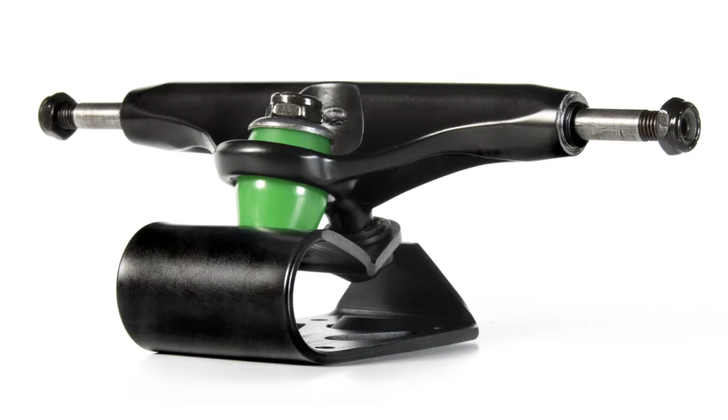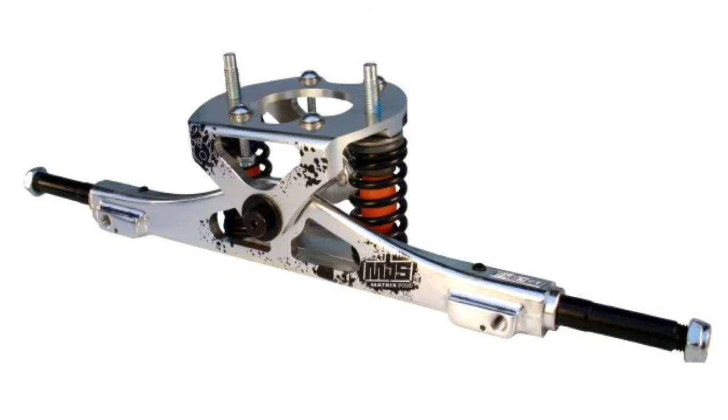So the suspension first. Looking online, you can see this example called an Avenue truck, which is basically just a piece of metal that bends and has some flex to it. There's this other truck that has springs in it.

I didn't really like either of these because I found that they were both a little complicated, and this one tends to create speed wobbles, which impact your ability to ride at high speeds. This one just seems a little too complicated for me to make.

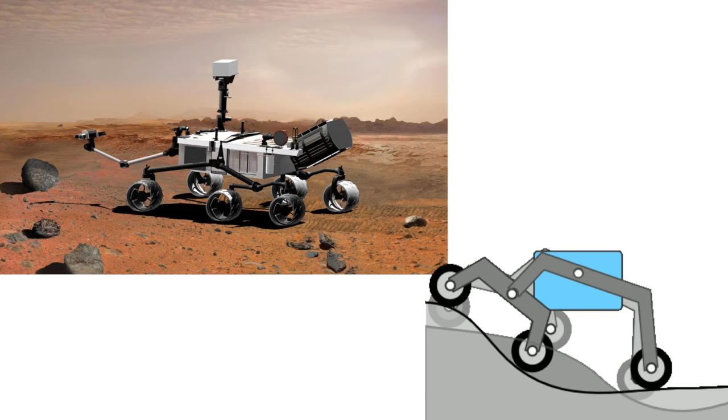So then I thought about the Mars rover and how it's able to get over bumps and cracks. Basically, it has this piece here which goes up and down—I'm focusing just on this rear piece in the back. This extends the diameter of a wheel without making a larger wheel. So I thought, hey, this could actually work.

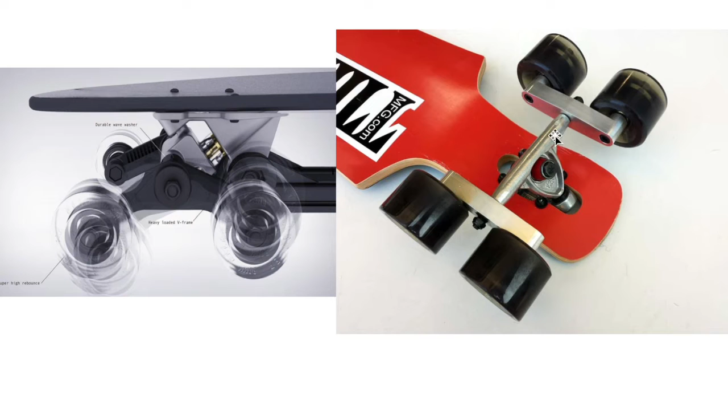So I looked online, and sure enough, people have already come up with this idea. It's really simple—just one piece of aluminum and then two wheels attached to it. Here's another example of that.

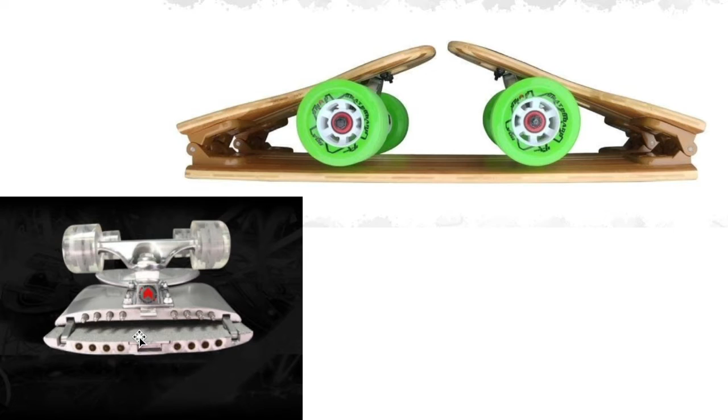For the foldable longboard, I wanted to make it a little different than these, which are basically a hinge design. That could work, but the problem is I'm not sure if it would work too well with an electric longboard, since these examples are also not electric.

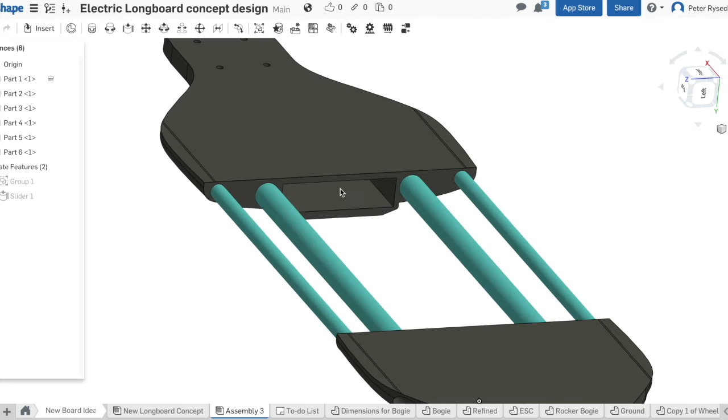So this is what I've come up with for the foldable design. I've also made a little opening so the batteries will fit inside the board, as well as the ESC, which will go in that little box there.

For the foldable part, I was thinking maybe I could use some poles, such as carbon fiber, and then fold it in as such. The advantage of this is that you can still ride it even though it's this small—maybe you can adjust it for different riders.

I like this design because everything's still the same shape—it's not really changing shape.

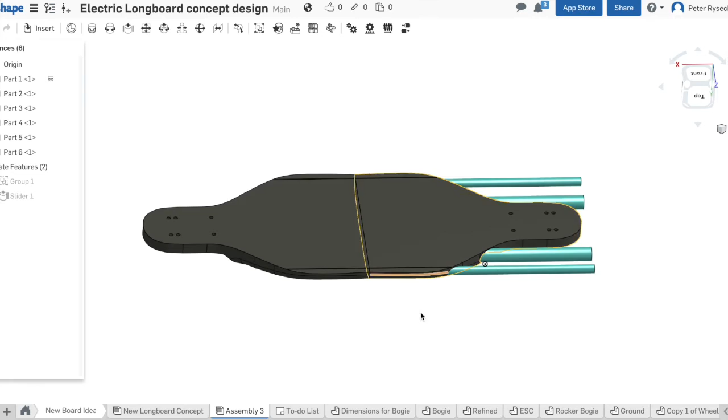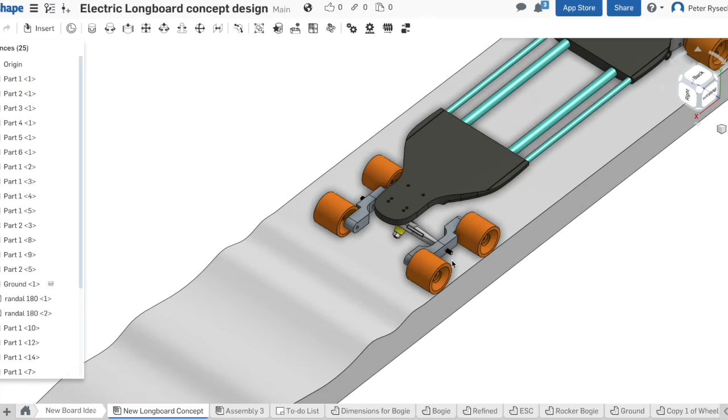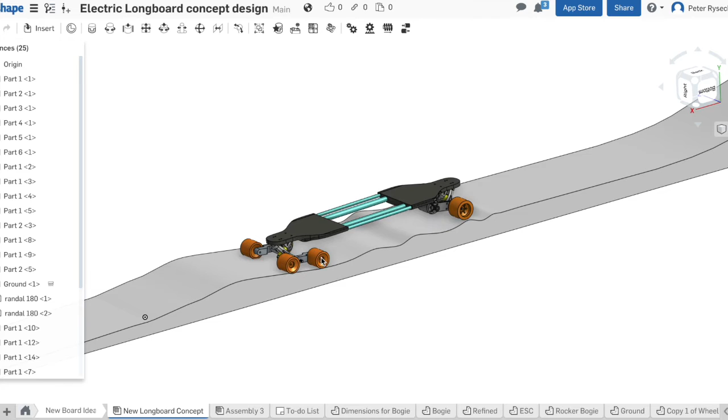When this longboard is moving, I can show it here—you can see it's absorbing a lot of these little bumps and divots in the ground. The rear wheel can also come over these bumps as such. Obviously the rear wheel won't be as smooth, but you can tell how much more deflection it has over the bumps compared to the front, as you can see here.

So if we go back here, I made this little mock-up simulation so you can see different environments this might encounter—going up a hill with some bumps, maybe, potentially.

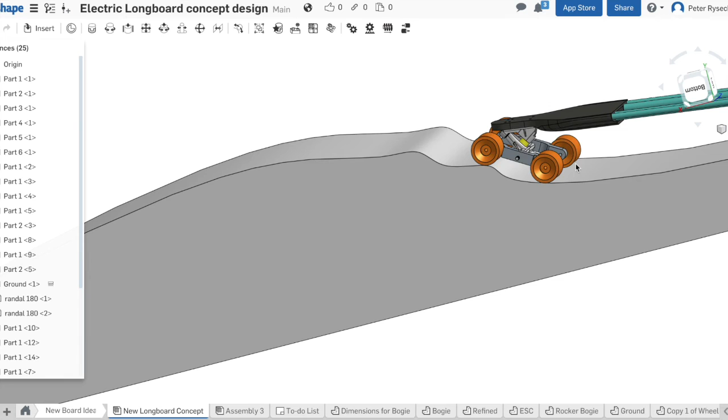As you can see, it's also very smooth. Let me just bring this back. I can always change this landscape to whatever I want, so as I continue, I can try different things.

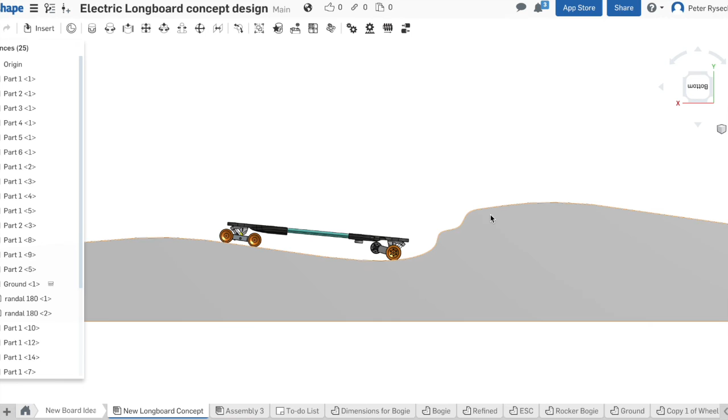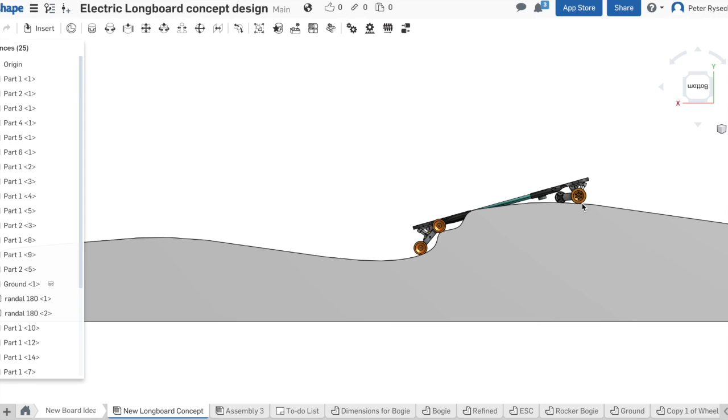So here I've got some potential stairs. Obviously I wouldn't be going up it, but if I were going down it like this, it could potentially work going downstairs. I've bottomed out right here, so maybe I'd have to change the dimensions of the bogie in the front, but otherwise it could potentially go downstairs. It wouldn't be very smooth, but it'd be better than just a typical longboard.

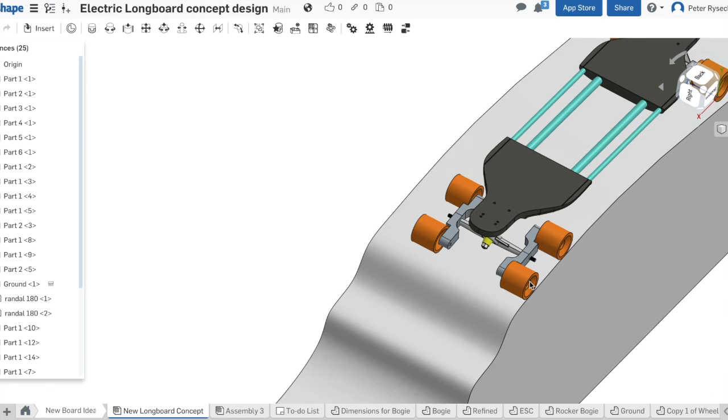Let's see if there's anything else. Nope, so that's basically the design so far. I'm going to keep working on it for now, but it looks like it's got a lot of potential. I'll check in with you guys later.